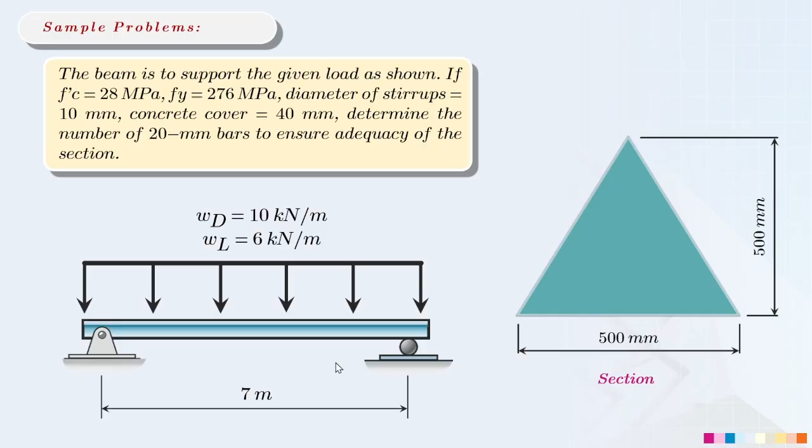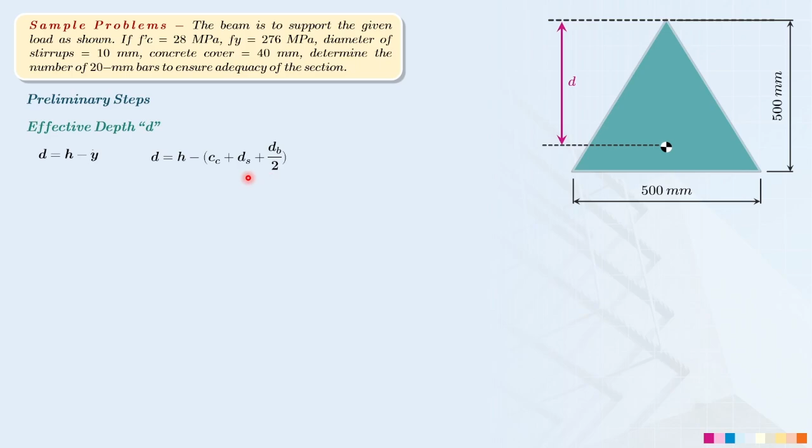Okay, so paano ngayon tayo magde-design for this one? Okay, so first step natin under the preliminary steps is we need to determine the effective depth. Obviously, for our effective depth, best to assume that our main reinforcement is in a single layer. So we can determine the location of the centroid using the concrete cover, diameter of stirrups, and half of the main reinforcement. Okay?

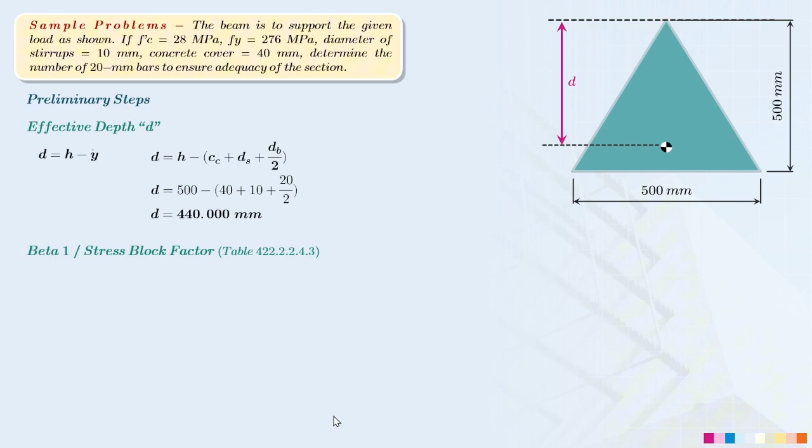The height of our triangular section is 500 millimeters. So we subtract from it the location of the centroid, 40 plus 10 plus 20 over 2. So our effective depth here is 440 millimeters. Okay? And then let's solve na rin our beta 1, the stress block factor, using this condition which relies on the value of f'c. Our f'c here is 28 MPa, so the value of beta 1 is now equal to 0.85.

Okay? Now, let's have the design strength bending moment. Since hindi directly given yung ating ultimate bending moment sa sample problem, we need to determine it. One of the techniques para malaman natin yun is kunin muna natin yung maximum bending moment based on the simply supported beam. But first, we need to determine the design uniform load. Since ang load cases lang natin dito is dead load and live load, we will use 1.2 dead load and 1.6 live load: 1.2 times 10 plus 1.6 times 6. So our ultimate uniform load is 21.6 kN per meter.

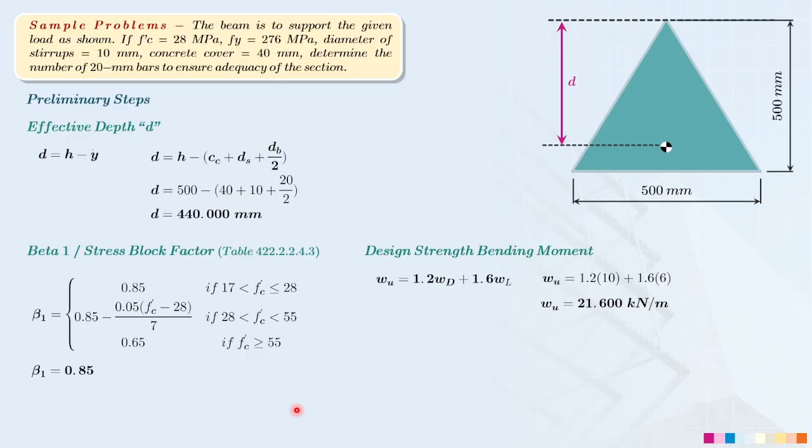So now we can determine our ultimate moment. Since given here is a simply supported beam, we will use the formula wL squared over 8. Substituting, that is 21.6 times 7 squared over 8. So our design moment here is 132.3 kN-m. Ibig sabihin, yan na po yung gagamitin natin sa design para sa ating reinforcement under this triangular section.

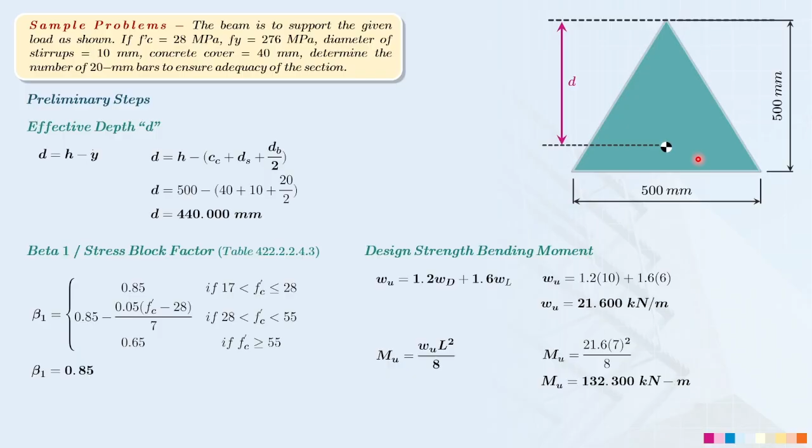Ngayon, one of the preliminary givens na kailangan nating i-consider is the computation of the gross area. Very important yan, lalo na sa steel area limits natin later on. Ang gross area is hanggang saan yung sakop ng ating effective depth. Since assume natin na yung taas ay compression and yung nasa baba ay tension, ang concern lang natin is the location of our effective depth, which we already computed as 440 millimeters. Yan po yung sakop ng ating gross area. So para makuha natin ang gross area, we need to determine the area of this triangle.

Please take note na the base and height of our triangle are very similar. Ibig sabihin, the height of our gross area is the effective depth, so best to assume that the base for our gross area is also the effective depth. If we substitute, this is now equal to 1/2 times the square of the effective depth, kasi parehas lang yung ratio ng original base and height, which is 500. Substituting, we get the gross area, which is 96,800 square millimeters. Okay? So yan na yung ating preliminary step.

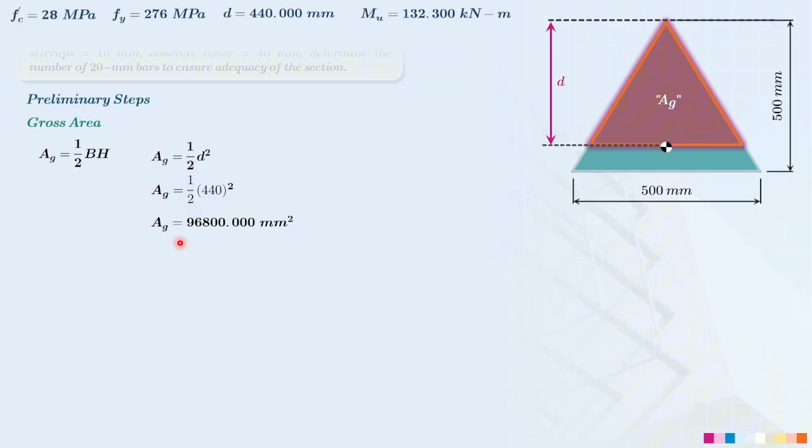Next preliminary step: since uniform yung ating cross-section, let's determine the area of the compression block. Wala tayong case number 1 and case number 2 in terms of the height a, kasi consistent siyang triangle hanggang sa dulo. So isang compression block lang ipapakita ko, which means we need to determine this area, the area of the compression block. Its height is the value of a, and we use the same formula for the triangle, 1/2 base times height. Next is its area in terms of this figure, same lang ng ginawa natin sa gross area.

This is 1/2 times the base multiplied by the height of rectangular stress block or yung value ng ating A, which is this one. Kaso ang problema nga lang, kailangan in terms of A yung magiging formula natin sa ating area of compression block. What we need to do here, let's prove it using ratio and proportion. And lumalabas naman dito na yung ating area of compression is this one.

Okay? However, once again, yung ating value ng x na nandito, probably later on kasi, kapag sinubstitute natin tong base and height, class, possible rin na A rin yung lalabas. Kasi nga, alam naman natin na yung base natin is 500, yung height natin is 500 also. So, ang lalabas sa kanya is 1, which is x times A. Later on, we can already substitute dito sa na-derive nating area of compression block. But we will leave this as is. Okay. So, next procedure na tayo.

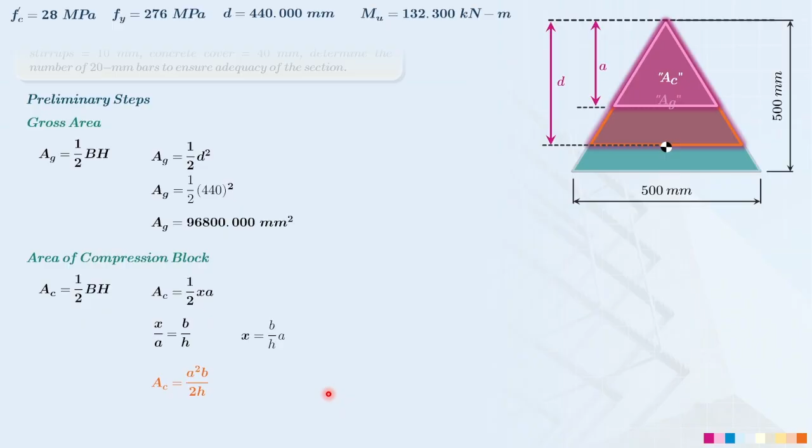So, we can now calculate for our steel area limits. Of course, we will start with the maximum condition, which is, ang ginawa ko lang dito, class, is yung steel ratio at the maximum condition, minultiply ko lang sa gross area. Okay? So, substitute natin lahat ng given so that yung lalabas na steel area at the maximum condition, this is now equal to 3,040.783 square millimeter. Okay? So, yan yung maximum value natin.

For our minimum value, actually, ganun din, no? Kaya lang, in terms of area yung kakomputin natin. Okay? So, substitute lang yung ating mga values here so that our first minimum steel area, this is now equal to 463.965 square millimeter. And for our second minimum steel area, which is under this derived formula, and substitute natin once and for all, so ang makukuha natin dito, second minimum steel area, this is now equal to 491.014 square millimeter. Okay? So yan na yung magiging steel limits natin later on.

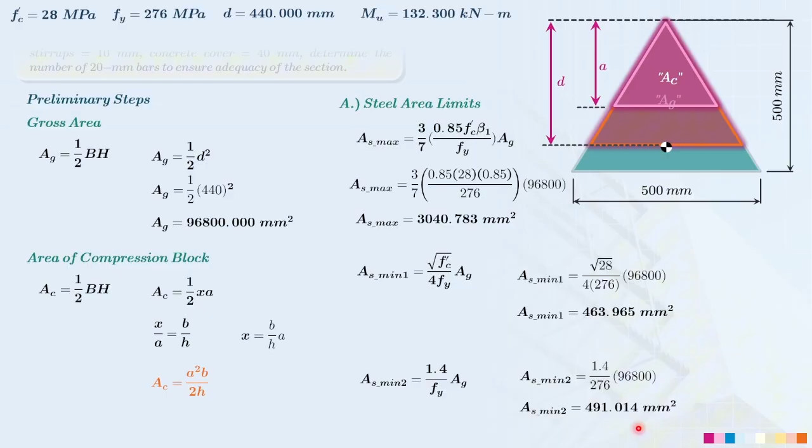And also class, please take note na ganun din yung gagawin natin for our minimum steel ratio. Minimum steel area, which is we need to determine what is the largest among those two na nakuha natin. And ang lumalabas nga dito is equal to 491.014 square millimeter. Ibig sabihin po niyan, doon sa next step natin, we need to check later on this condition. Ideally, yung ating actual steel area should not exceed dito sa ating maximum steel area natin. Which is our next step, we need to solve for the actual steel area. Okay? So, we will start using this formula.

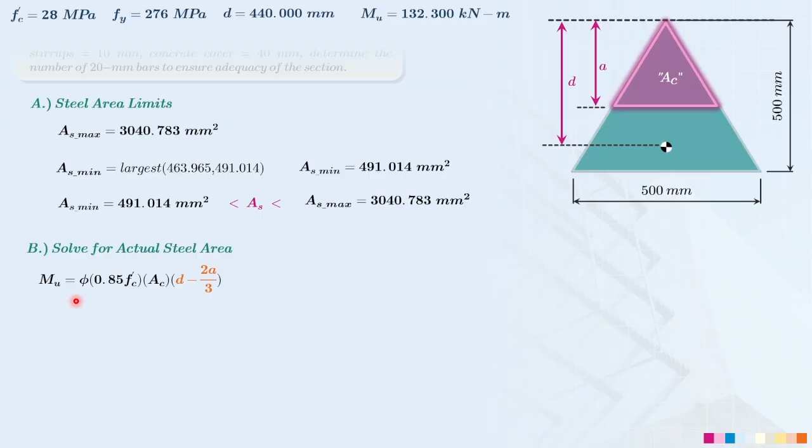Okay? Yung ating ultimate moment natin, this is now equal to our nominal bending moment and then multiply sa ating strength reduction factor. However, sa ating nominal strength, kung mapapansin ninyo, itong moment arm natin, okay, this is only applicable lang sa triangle. Kasi yung ating location ng actual compression for this area of compression natin, somewhere here, dito. Ibig sabihin, yung height dito sa kanyang centroid, this is 2/3 of the height of our A. So that, kapag kinuha mo ngayon yung ating moment arm dito, isusubtract mo lang yung effective depth and then yung location ng ating centroid. That's why ito yung naging moment arm niya itself.

Okay? Now, palitan naman natin yung ating area of compression. So our area of compression would be this one. Okay? So now, what we can do here is let's substitute yung mga nakuha nating values. So please take note, kapag tayo ay nasa design, dapat naka times 10 raised to 6 yung ating moment. Kasi para at least yung nasa kabila, this is in terms of Newton millimeter din yung conversion dito sa ating ultimate moment. So that yung value ng ating A, this is now equal to 200.898 millimeters. Okay? Ngayon, meron na tayong value ng A. Meron na rin tayong mga limits natin.

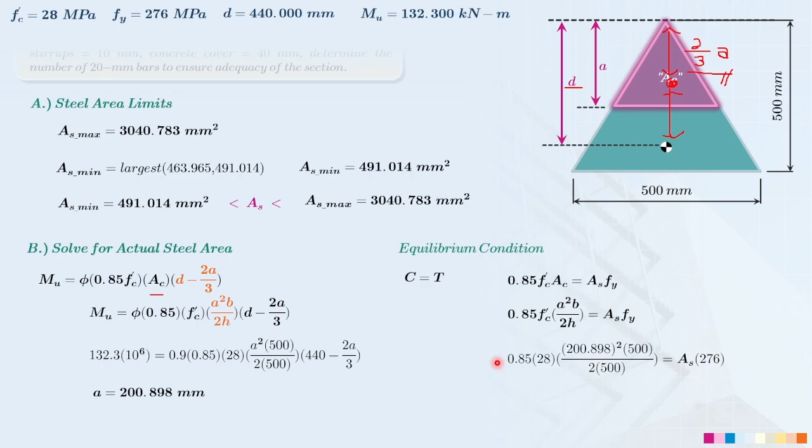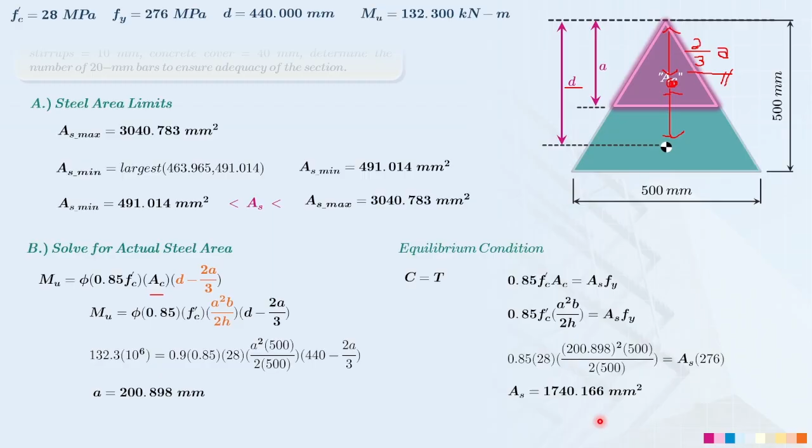So, pagdating natin sa equilibrium condition or equilibrium compatibility, dito na rin natin pwedeng hanapin yung ating actual steel area. Okay? Kaya dito tayo mag-ending for our design dahil nga yung essential natin for the value of A, we can substitute lalo na pagdating natin ng area of compression. Okay, so in-expand ko lang yung ating formula and then sinubstitute ko lang respectively according to our conditions earlier. Isa lang yung ating unknown dito, which is area of steel or steel area natin for our tension. So steel area natin, this is now equal to 1,740.166 square millimeter.

Ibig sabihin lang po niyan, we can now compare doon sa ating mga limits, which is this one. Okay? So, kung mapapansin ninyo, in comparison with our minimum steel area, hindi po bumaba ng 491.014 square millimeter yung ating actual steel area. Ibig sabihin lang po niyan, okay po yun. However, in comparison with our maximum steel area, hindi rin po siya lumagpas. Ibig sabihin lang po niyan, class, our given section here is good for the singly reinforced beam.

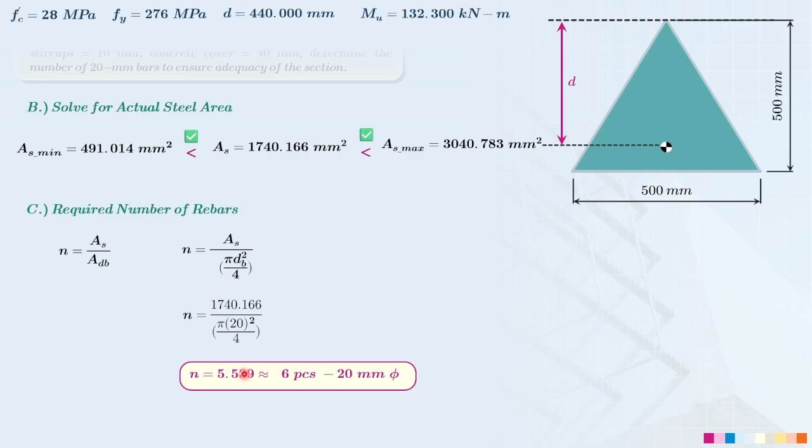Ngayon, we can now determine how many reinforcements of the rebar that we will use, which is same lang nun sa ating rectangular beam. So what you need to do here is you need to divide your total steel area sa isang area ng 20 millimeter diameter. So which is this one. So substitute lang natin. So ang makukuha nating number of reinforcements here, this is now equal to 5.539. So of course, ayaw natin ng may butal. Let's round it up to 6 pieces of 20 millimeter diameter. Ibig sabihin lang po niyan, galing doon sa ating simply supported beam with a uniform load, ang design natin dito ay 6 pieces of 20 millimeter diameter.